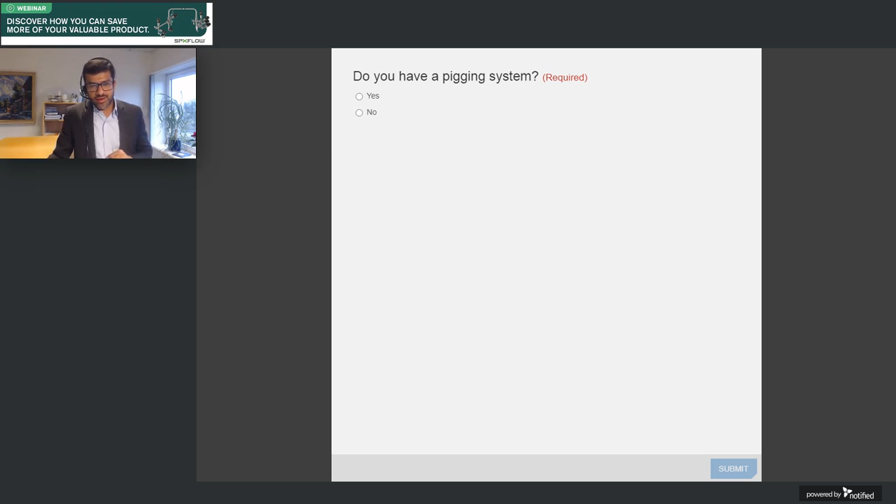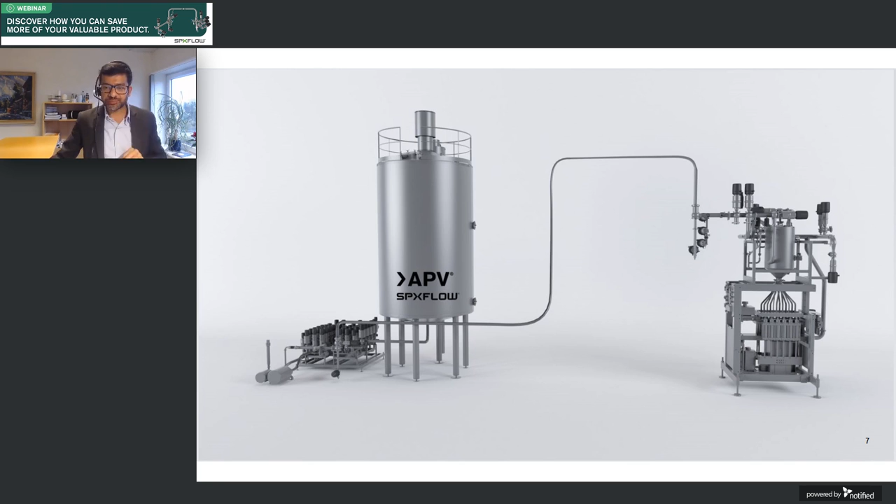This is the finished product tank and this is the valve manifold. From the finished product tank, the product is going to the packing line and getting packed here. So when the product is over and production is over, you need to do the CIP of this line. How we can do it in a better way that gives you all the savings I was discussing in the previous slide will be shown in the animation coming up.

Until now, within SPX Flow, we already had 2 types of pigging system or scraping system, which helped to recover the product. Those systems were called type A and type B. In front of you now is a type A system, which basically, if you follow the green arrow, goes from point A to point B and back. This is how this system used to work, and it was used for all fresh products.

It is a sanitary system, but this system cannot be used for aseptic product, for long life, for ESL, for neutral pH and ambient products. It can be used for fresh products like fresh yogurts, milk creams, drinking yogurt, stirred yogurt.

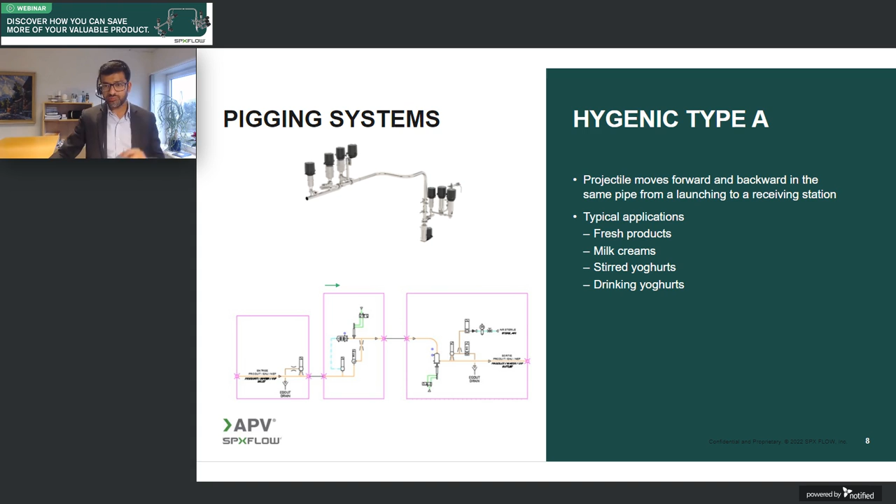Take an example of a line where you have a white mass coming in the main line, that is yogurt, plain yogurt, and then you are dosing fruit and flavor. For this main line, you can use type A, which was shown in the previous slide. But the flavor and fragrances need to be changed over a lot within a shift, within a day.

So what if there is a system that helps you change the flavors again and again without cleaning, without CIP? What we are doing in type B system is pushing one flavor behind another flavor, keeping the scraper in between.

So if you are running a pineapple yogurt, for example, and you want to change to strawberry, you can just push another flavor, keeping the scraper in between, and continuously change the flavor as needed without stopping the plant, without stopping the packing line.

Because as you also know, once the packing line stops, it takes quite a while again to come to peak performance, to optimum performance. So this type of system is mainly used for flavors, fragrances, additives at the final stage just before the packing hopper. So we had both type A and type B.

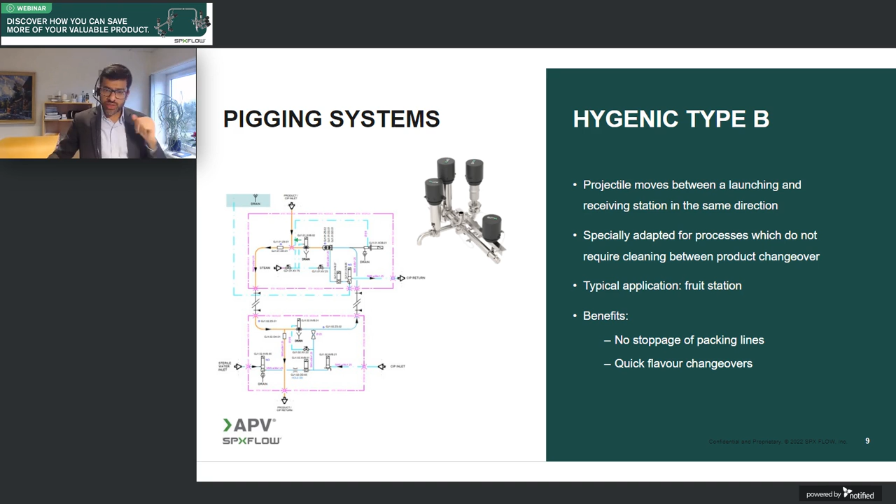This calls for additional design changes, and the valves should still be hygienic, leak proof, full with automation, long lasting. The inventory should be such that you don't need a whole lot of separate inventories than your existing SPX valves. So keeping all this in mind, we developed those valves which can help you with this system.

The pipe starting from the finished tank until the packing hopper should have no diameter change, and the bends should be wide angle bends, minimum 3 times the diameter of the pipe, so that the scraper can move in easily. Of course, the quality of welds matters too, because if we don't have smooth welds, there can be bad CIPs and hence growth of bacteria.

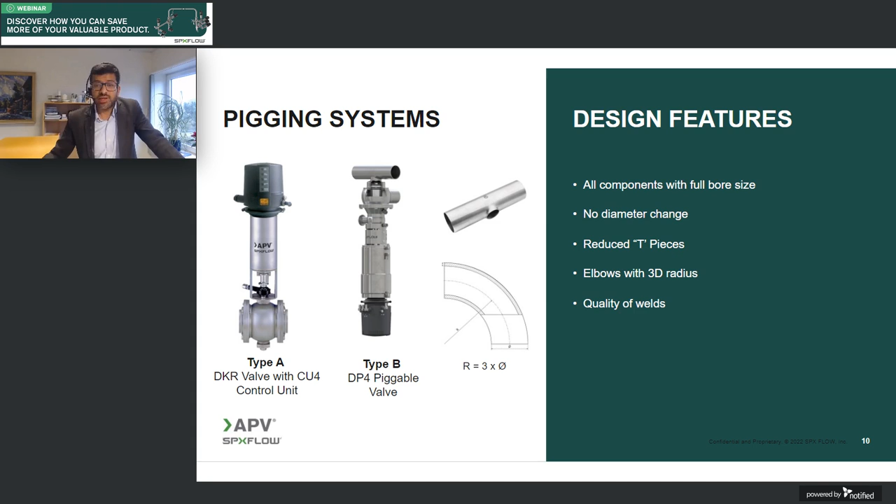The name Aseptic gives hints to many things about what the changes would be, but I'd like to go a little deeper into what it means when we say aseptic, and how we are able to achieve a system that can run aseptically and maintain aseptic and hygienic conditions throughout the running cycle. There were challenges, there was a need for upgrading everything we were doing: the valves, the steam barriers, the way we design the purge system.

We did that, and you will see the technical specifications and approvals in place, and we were able to launch it. So here we present to you SPX Flow APV Aseptic Rapid Recovery System.

There are many things we could say about it in a qualitative way, the benefits of it, but we want to bring you the benefits in terms of quantifiable numbers, in terms of what it means to you in terms of figures.

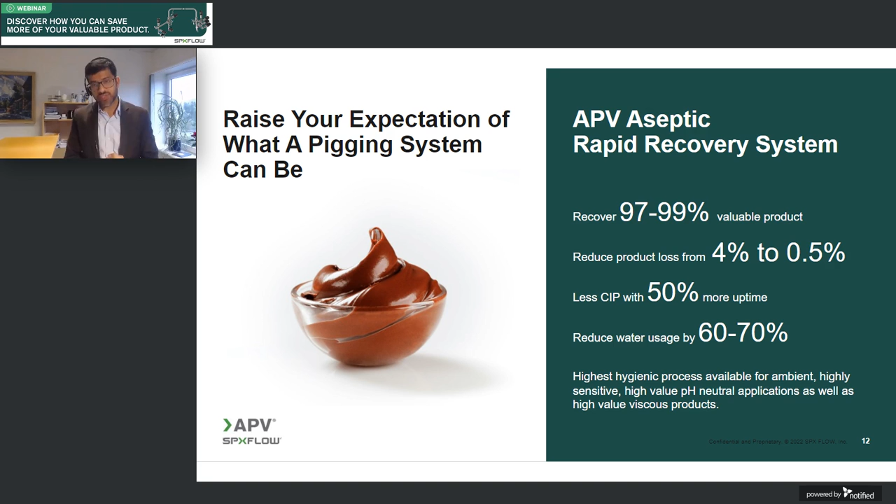Here it will show how it works, and this is a small animation of 2 minutes. I will take some breaks to explain the working of it. Let us see.

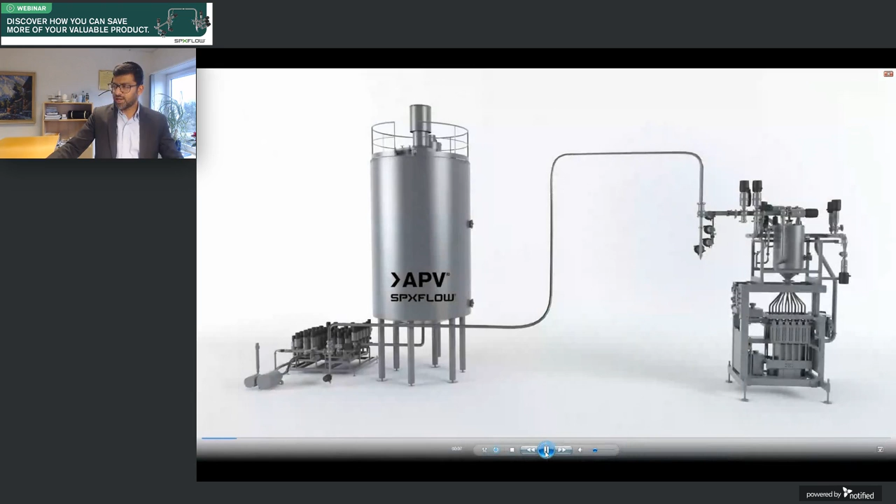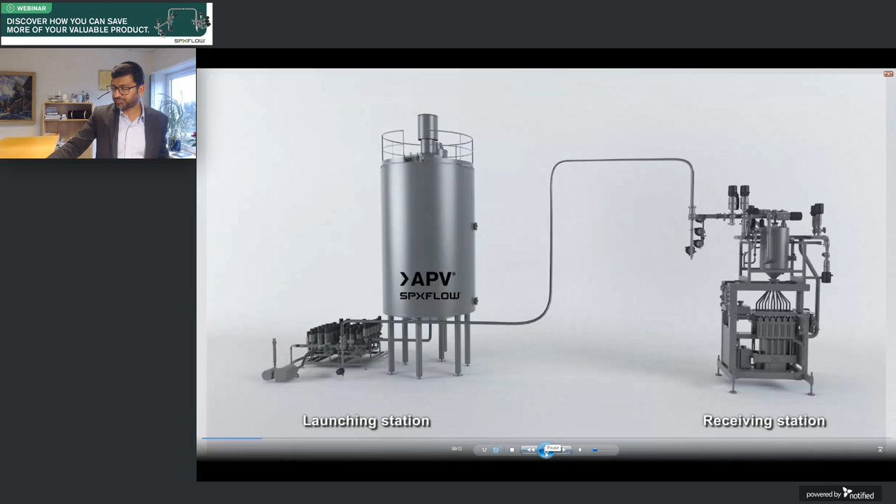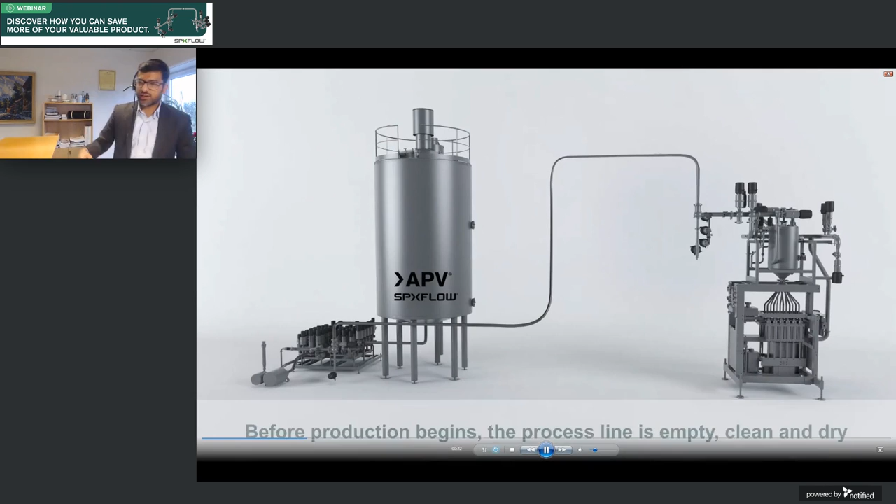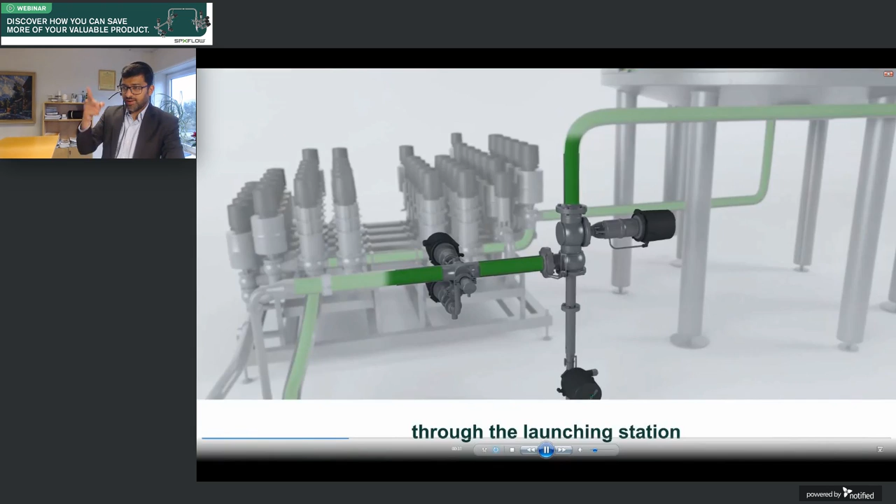You will recall this image from the first slides we saw, and now this is explaining how the pigging system functions. The hygienic version, type A, is being shown. The green color is the product, it can be any product. Now the production is going on, the tank is getting empty, and the product is going to the packing hopper.

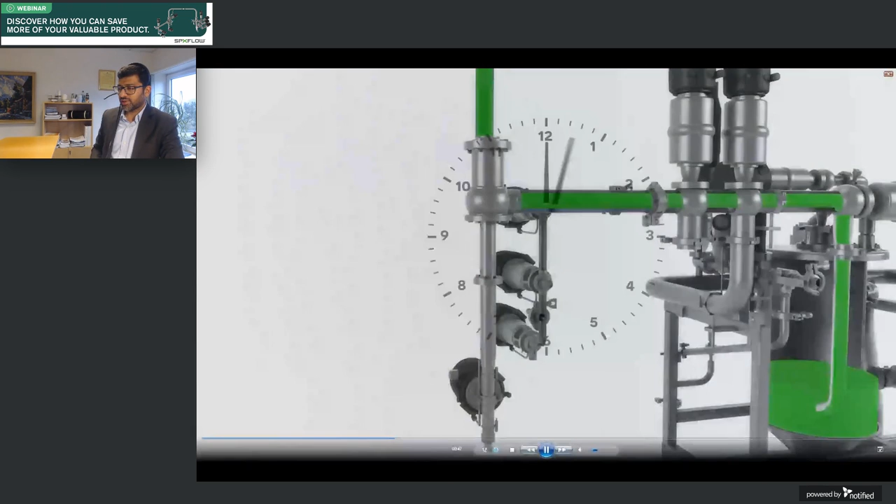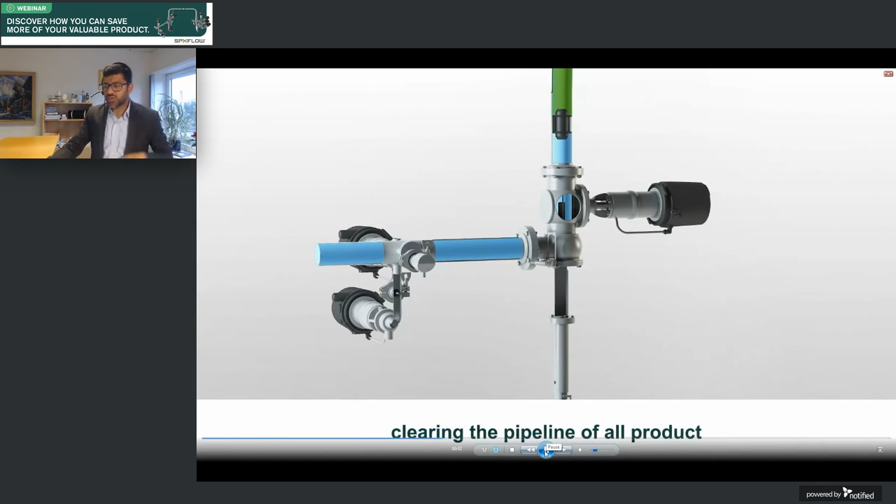Once production is over, before the CIP, cleaning in place, starts, we need to flush the product from the pipe. The flushing is going on now, but the water is not directly in contact with the product. Water is pushing the scraper, and the scraper is pushing the product.

The scraper that you see here is available in different materials: EPDM, Viton, silicon, depending on the need, and there are specifications coming up in the slide. But all these materials that are in contact with the finished product are certified for migration certificate, food safety and hygiene.

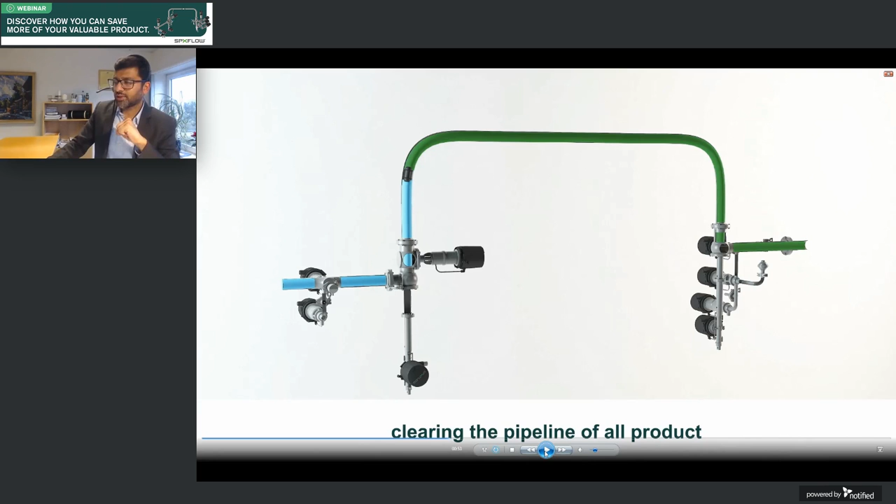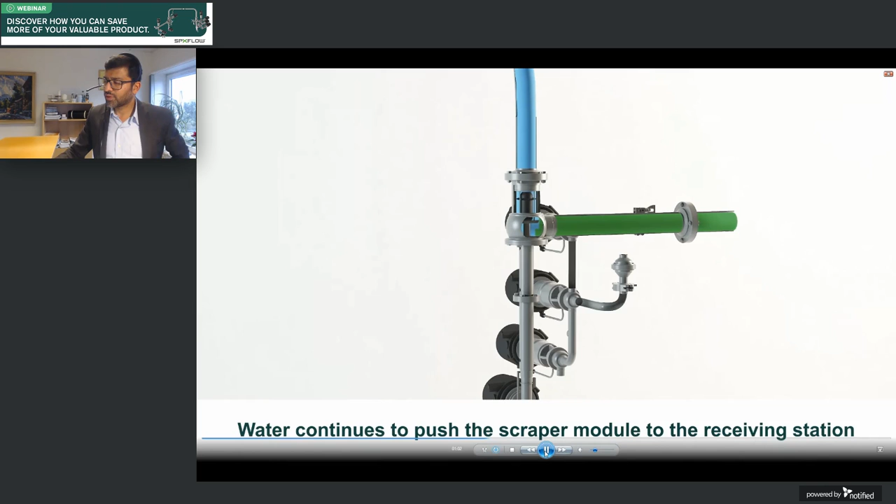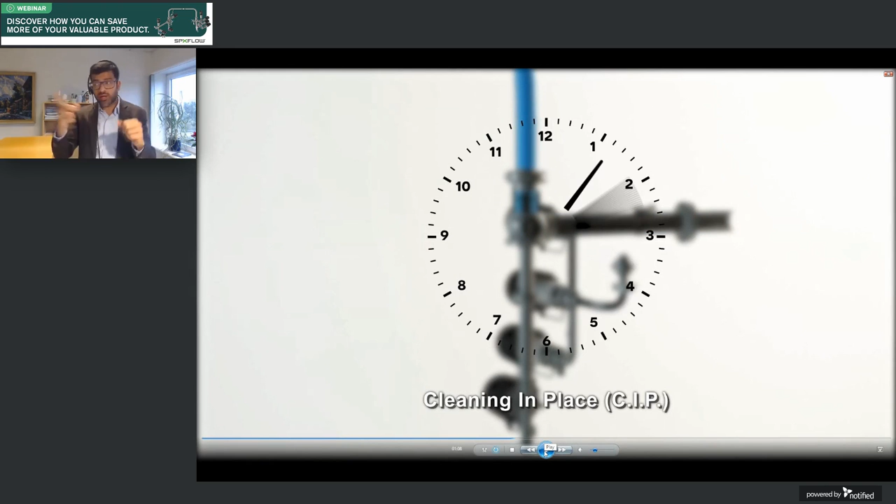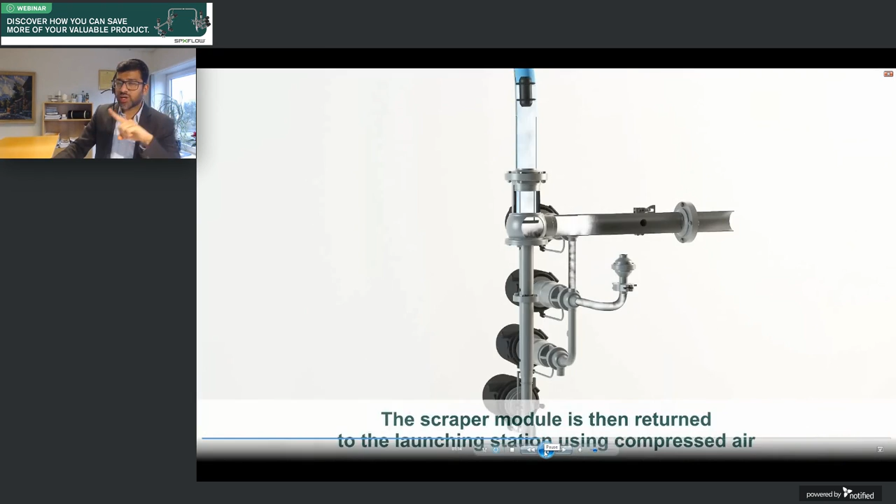Now the CIP is on, but when the CIP is being done, you also clean the scraper along with. Once the cleaning in place cycle is over, then we are pushing the scraper back to its initial position, and here we are using compressed air and not water.

So the question is, why do we do this? When we are pushing with the water initially, we are more in control of the speed of the scraper, and there is no surging and splashing at the hopper because we want to do it gently. When we are pushing it back, the water is actually getting drained, so we can do it with the compressed air. And by doing with compressed air, we get the dry line. So the next production, you don't mix product with the water. So you get both the benefits.

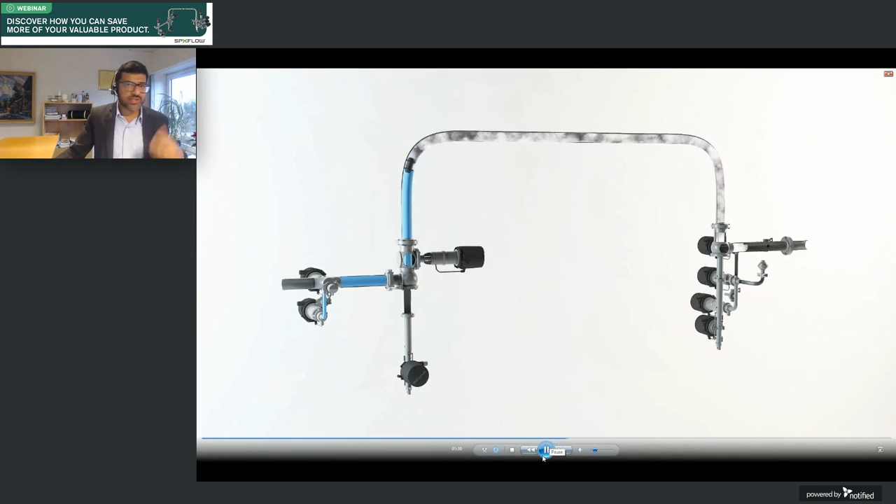Before the CIP, you don't mix water with the product, and after CIP, vice versa. So when the scraper is going back, it sits in the original position, and you can start the next production. And this continues. So you get the benefit. As much as you run the system, you keep on getting those benefits.

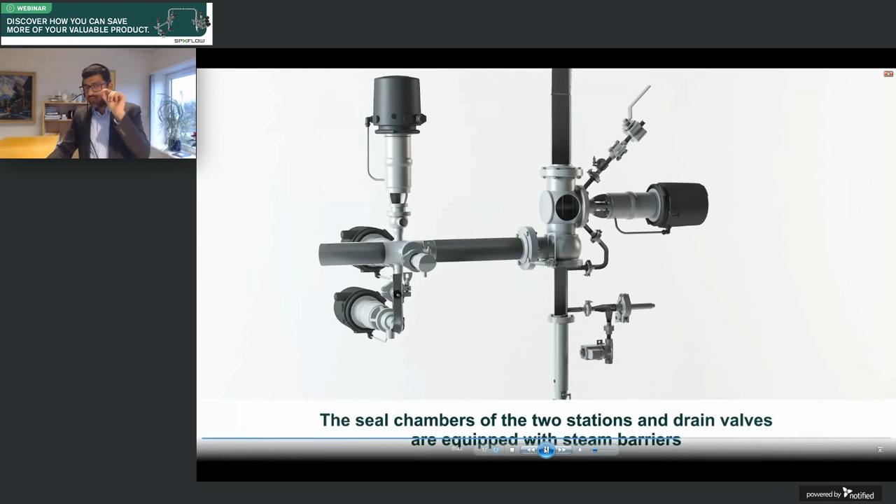In the aseptic version, what we do is, as you see, we create the steam barriers at critical points where there is a possibility of contamination. So steam barriers are one of the things that we do, and then we also keep the entire line under positive pressure during the run.

So what we have here at the launch of the scraper or the projectile, that is called the launching station, and what we have near the hopper where the scraper goes and sits, it is called the receiving station. So all in all, this system is made up of a launch station and a receiving station.

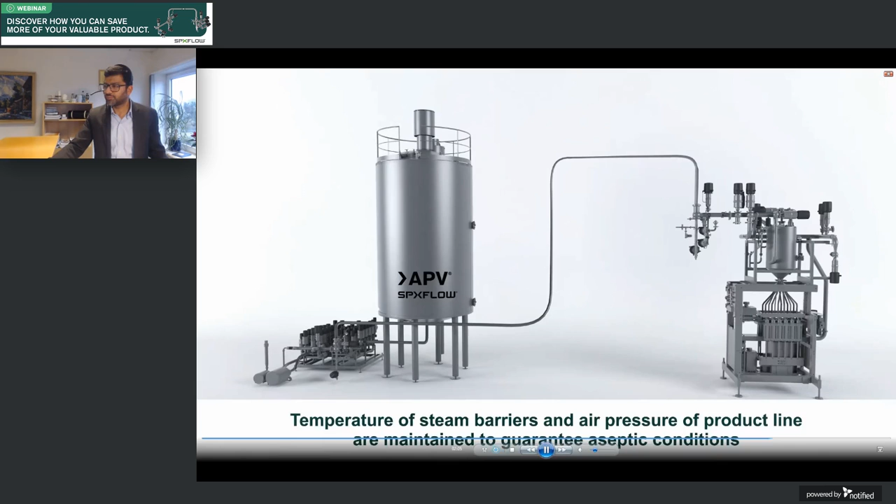Coming back to our slideshow here, we have actually developed a ready to use configurator and a ready to use return on investment calculator for this system. So if you have any question like my line size is of this capacity and this length in terms of meters, we will be able to give you a very quick indication about how much will be the savings, what will be our return on investment, and what is the range of price. So we can do it pretty quickly.

As you saw in the animation, this system is very simple in terms of installing, because it is not a big piece of equipment. It can fit in your existing valve manifold, or when you are designing a new plant, it will not occupy a huge layout, and it is not complex to install.

Mainly it consists of three systems. One is the drain valve, which we use for draining the water, the launching station, and the receiving station. All the valves that you see here are coming from our own portfolio of SPX Flow valves, made in our own factories. So we have full control on the quality and the spares support for the entire life cycle of the valves.

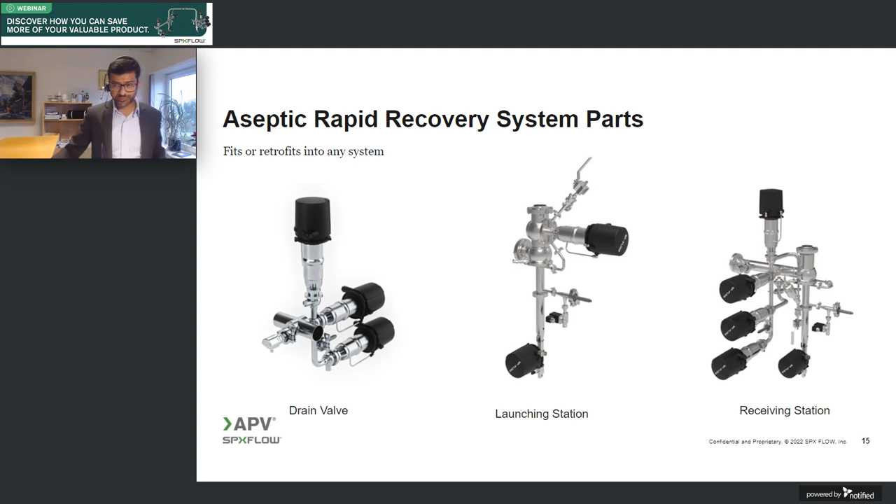In a new plant, you can of course install it for your upcoming projects, but in your existing factories where you are running the products, it's also very easy to retrofit, because as we discussed, it doesn't require lots of space, and it doesn't require a long breakdown in the existing plant. It is easy to add this setup and keep the plant running. So it is possible to do it for both greenfield and brownfield projects.

We normally get lots of questions about the scraper: what is the material, is it traceable, what are the compliances, how does it look, when do we change it. So here what you see is an example of a scraper in white color. In the animation it was black. So depending on whether you are choosing silicone or EPDM, it can be both.

The scraper comes with a unique number, which is a traceability number. So from the inventory until the scraper is being used, you have full traceability. When it is being used, whether it is in the launching station or receiving station, you are always aware of it on the computer screen, because there are proximity switches which show where it is present at any given point of time. If it is stuck in the line in the field, then also it is possible to locate it, because there is a small metal piece inside and there is a magnetic pen that we offer along with it.

Normally in a dairy, food, or cosmetic company, those lines are not enormously long as we have in other industries, for example. So it is possible to trace it if it is stuck in between. Otherwise normally it takes some seconds to reach from launching station to the receiving station. It is made up of food contact compliant material and the certificates are in place. It is FDA compliant and it allows you full traceability.

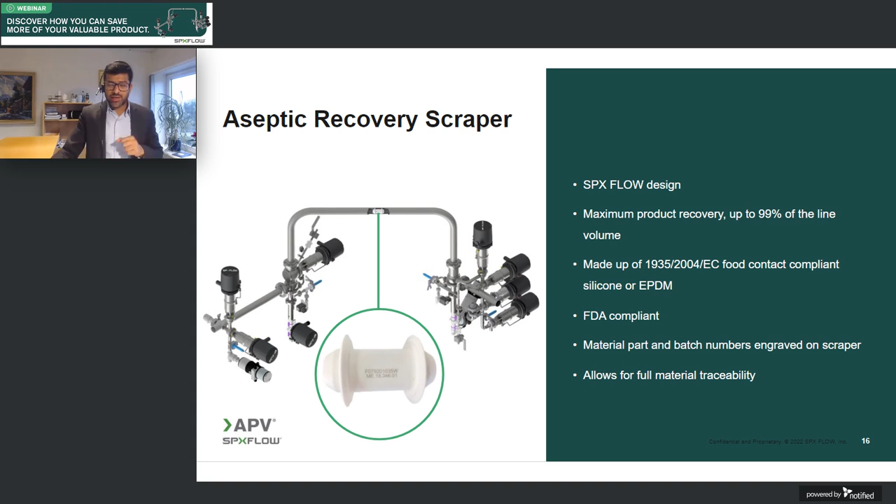What are the key applications? Anything that is of high value and sensitive product, ambient products which you need not store in cold store but on the shelf at room temperature. So ambient and aseptic products, neutral pH products, creams, dessert creams, cosmetics, and nutraceutical. Whatever is viscous and of high value, you can use this system.

It is also very sustainable to use the system, avoiding any post-process contamination. Once the process is done, if contamination happens at the end, the product goes to waste, which is not sustainable. This also helps you preserve whatever processing steps you took before. This type of aseptic scraping and pigging system helps maintain a high level of hygiene till the shelf life of the product.

What are the key benefits? All the benefits we discussed for the hygienic system are still there, but here there are some more benefits, because it was built to give you aseptic conditions throughout the process through a steam barrier, PTFE diaphragm membrane valves, and pressurization, meaning positive pressure during the entire run of production.

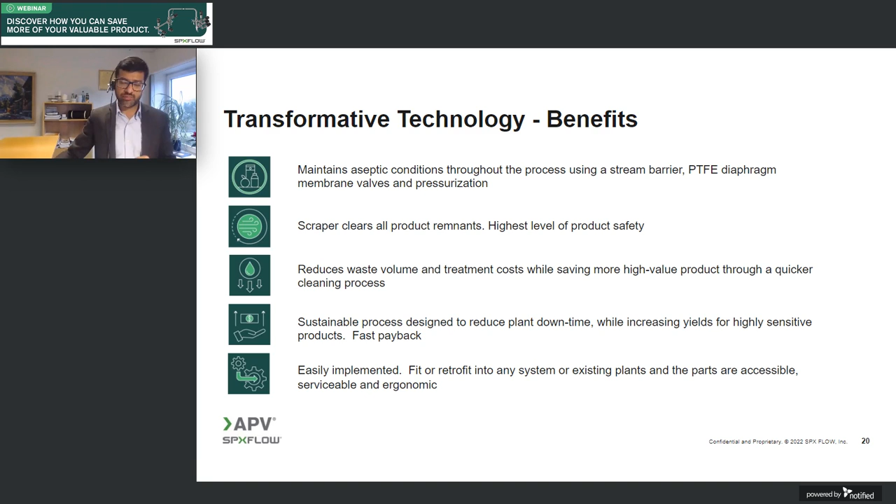So what are the possibilities to implement, and where all can it be implemented? On the applications we discussed, anything you currently have in those applications in your factories around the world, it can be used. It can be used for greenfield and brownfield sites, and also for upgrading your hygienic system to an aseptic system, so you are very sure about the shelf life mentioned on the package of your product.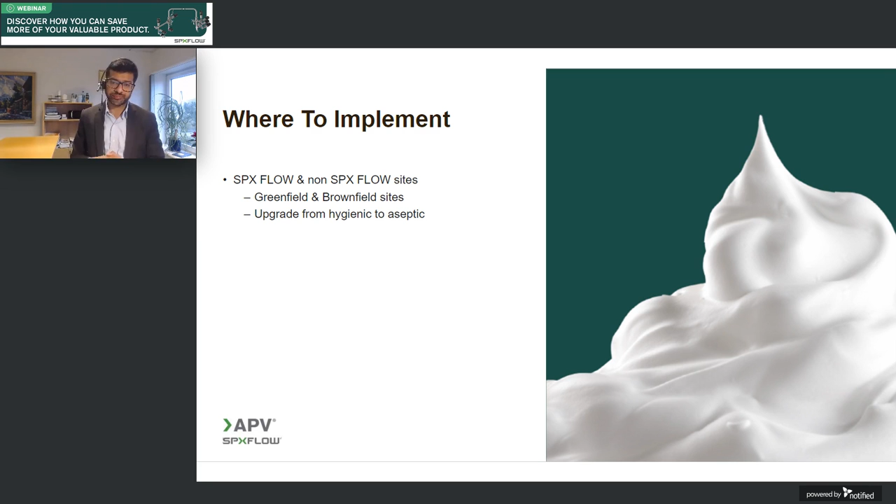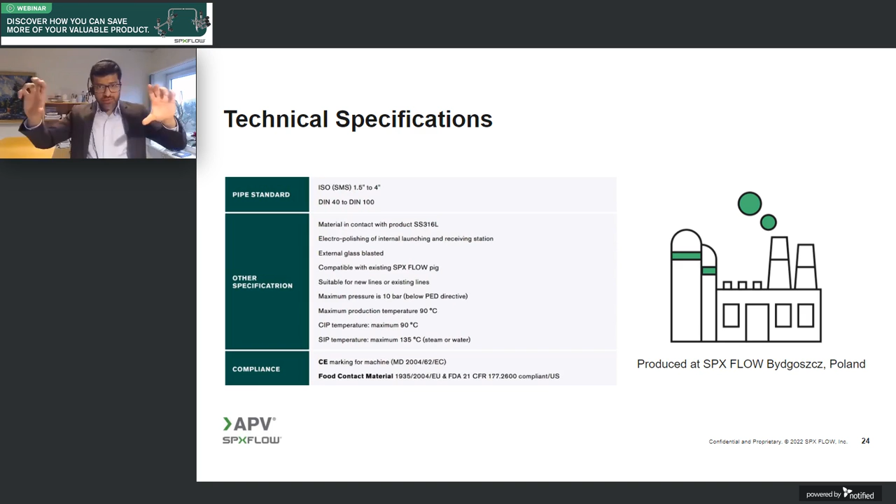Technical specifications are shown here. The pipe, normally in the dairy standard, we use standard pipes, starting from 1.5 inch to 4 inch. We have this aseptic pigging and scraping system developed for the full range of pipes. It is also available in DIN sizes from DIN 40 to DIN 100, covering the full range that you need.

All the stainless steel that gets in contact with the product is SS316L, electro polished for all internal surfaces for both receiving and launching stations. External is glass blasted. It is compatible with the existing SPX Flow scraper.

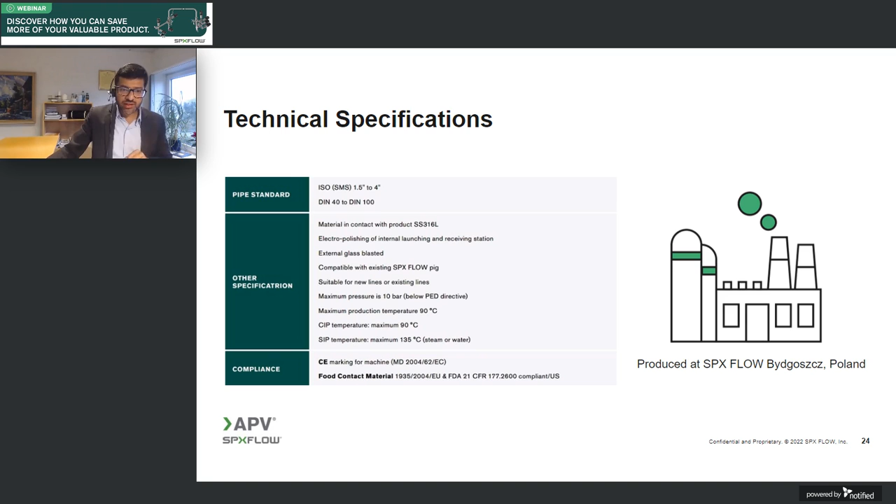It is important to see that we have this compatibility between the hygienic and aseptic systems. It is capable of handling high temperatures because we need not only CIP but also SIP, so sterilization in place is possible up to 135 degrees. It is CE marked with the compliance you can see here, including food contact material compliance. Produced at our factory, SPX Flow Bydgoszcz in Poland, with the huge knowledge and experience of our hygienic, sanitary and aseptic valves.

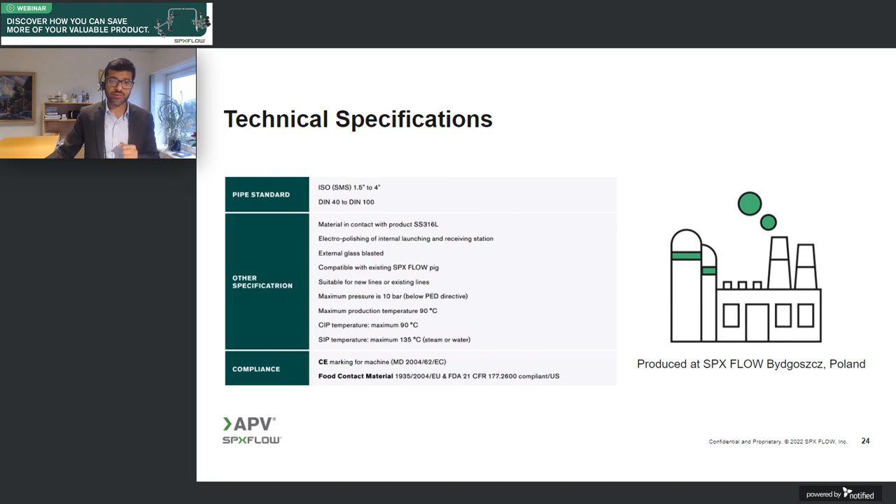It is possible to have various options on the basic system to suit you: line size, control unit, different seal materials, type of scrapers or pigs you can choose, and push configuration. So it is possible to choose and select. This is quite a flexible system, designed to suit your needs and be tailor made.

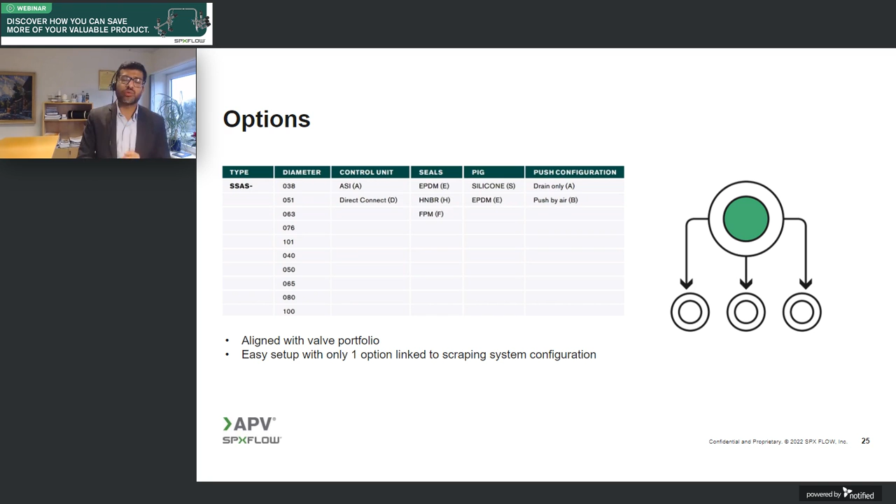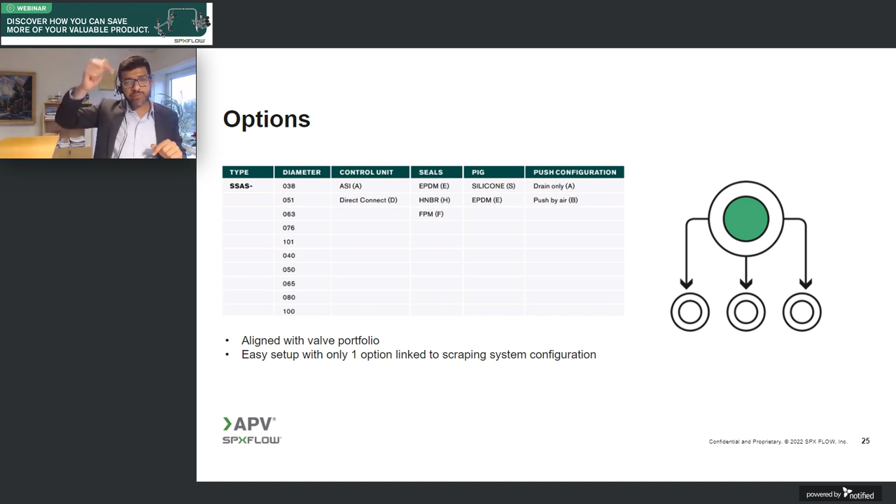One thing to note: if you are fitting this system in an existing plant, apart from the launching and receiving station, there might be some need to change the pipe bends if they are not 3 times the radius, because the scraper needs more space to move around. That's a change to keep in mind, but the rest of the pipeline can remain the same. There is no need to replace the full pipeline, only the bends.

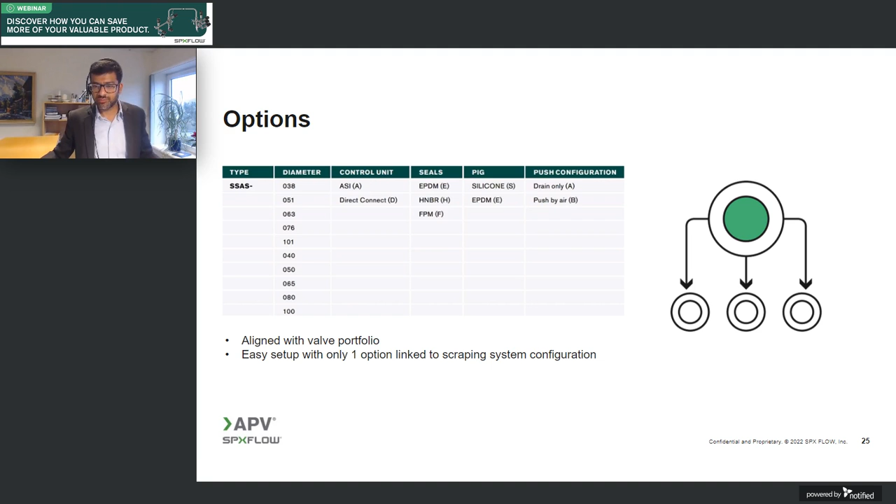Now this is where it gets very interesting, because until now we showed you the benefits, but these were qualitative things. We showed you some percentage figures to quantify the benefits. But when it comes to calculating real dollar or euro savings, how does it look? We've tried to make calculations based on average line size for average product selling in the market, because we need this price to make the ROI calculation.

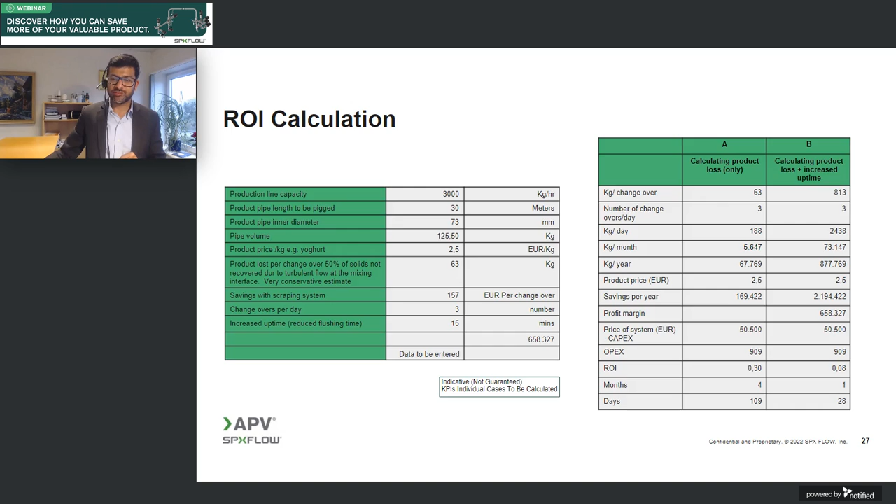So here is a question: please select what you see as the most important benefit of the aseptic pigging system. What would you like to achieve? More uptime, virtually eliminating product losses, saving water, saving energy, saving chemicals, or all of the above? Please submit your answer, and we will discuss the answers in the question and answer session.